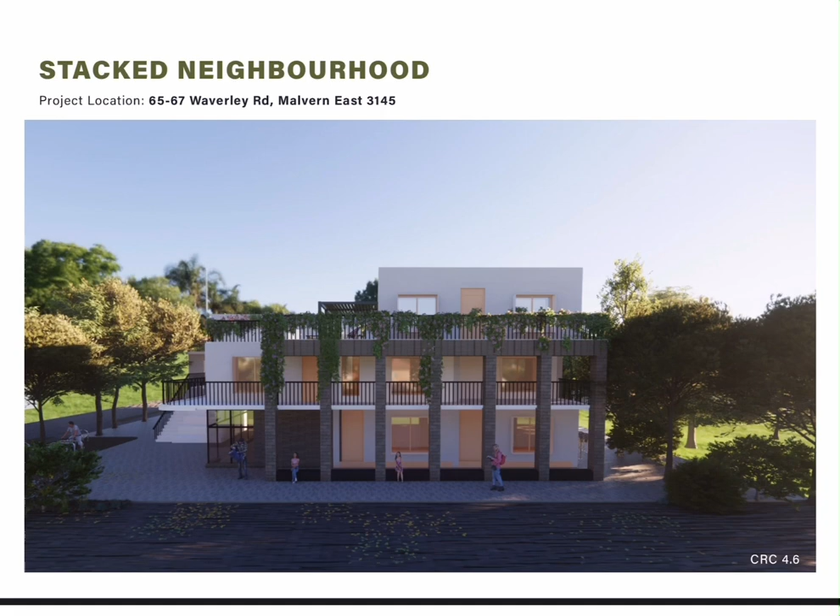With this principle in mind, we wanted a home that we can age in place, meaning its ability to adapt as we grow or move. And to achieve this, our primary concept was the kit of parts that allows us to adapt the internal volume as time moves forward, and combine this with the chosen material and design principle. And the Stacked Neighborhood was produced.

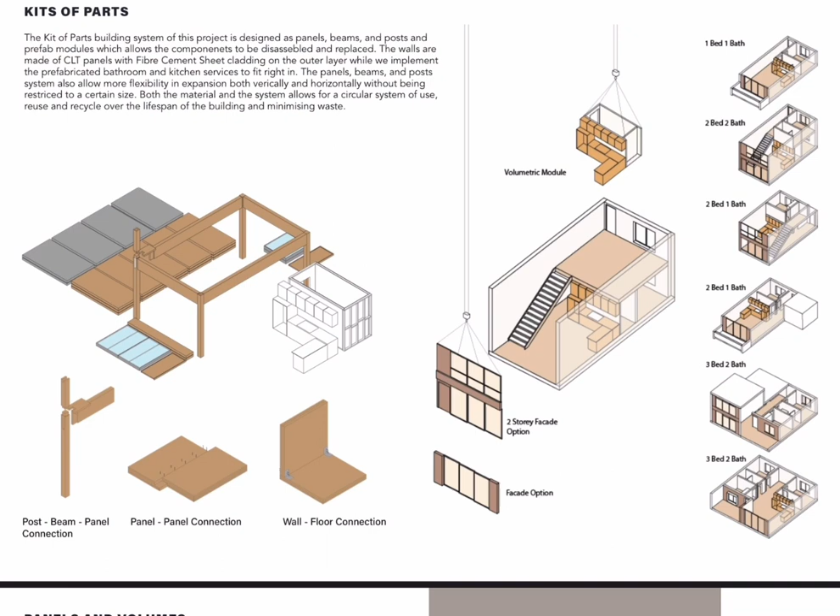So the kit of parts building system of the project is designed as panels, beams and posts and prefab modules, which allows the components to be disassembled and replaced. The walls are made out of CLT panels with fiber cement sheet cladding on the outer layer, while we implement the prefabricated bathroom and kitchen services to fit right in.

The panels, beams, and post systems also allow more flexibility and expansion both vertically and horizontally without being restricted to a certain size. Both the material and the system allow for a circular system of use, reuse, and recycle over the lifespan of the building, minimizing waste.

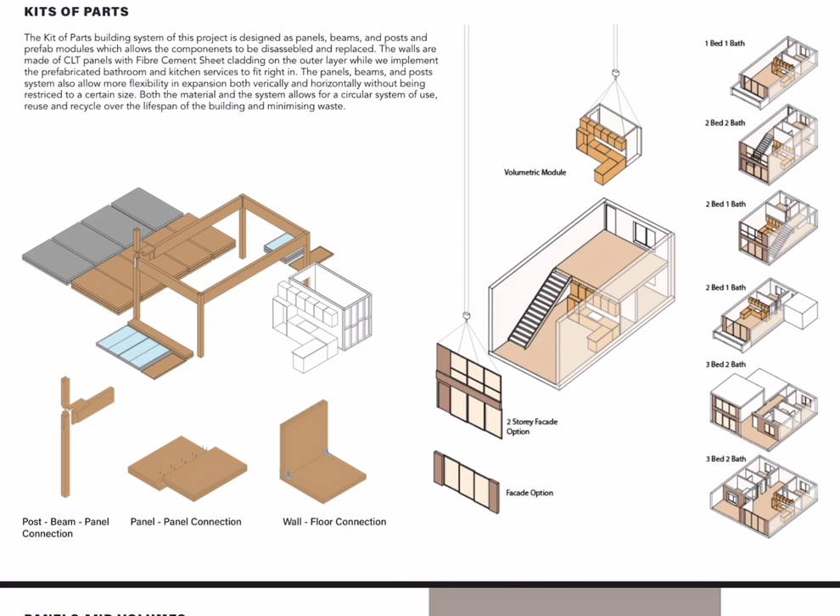So as you can see on the right diagram in our proposal, this is how we achieved a double story and single story variation that allows for generous living in sunlight as we use the post and beam system to expand and contract. You can see in the diagram, the bathroom is a prefabricated module and the main structure of the unit can be disassembled into panels and posts.

For sustainability, the apartment also incorporates passive house principles, which include double glazing, high-performing windows, great ventilation for indoor air quality, thermal insulation, and airtight construction. This is to ensure that each unit would be economical to operate and require minimal energy to keep them at a comfortable temperature. All of the units face north, while the bedrooms are located towards the south for effective cross-ventilation and enhancing the living conditions.

There are also shared communal spaces such as laundry, rooftop deck, and garden that minimize the overall cost and create opportunities for engagement. Along with these elements, we are also including a rainwater storage system and permeable pavings to reduce stormwater runoff. Open walkways that connect the two buildings create moments within the community as well as the street below that positions this project as a homely place in the neighborhood.

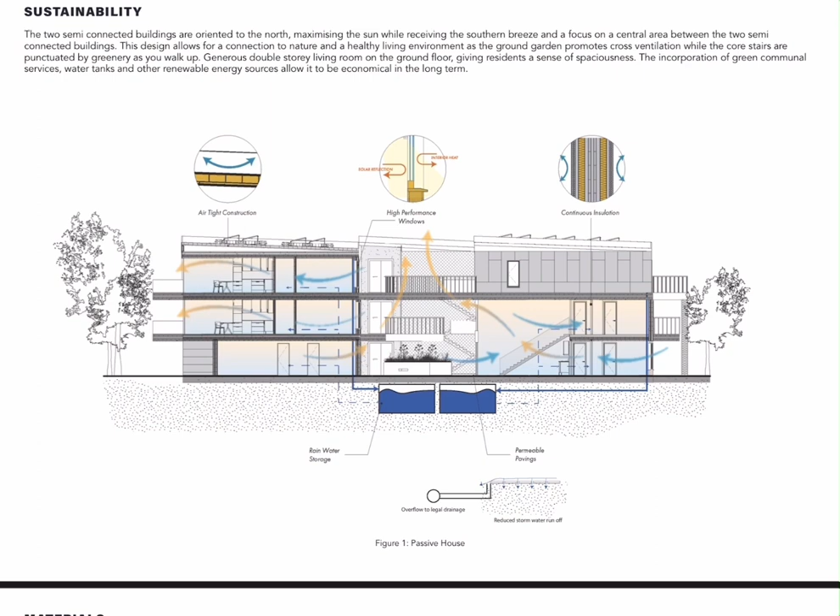And due to its proximity to the tram stop and shops within the area, we not only incorporated communal garden and retail space, there are seats and bike racks available for those waiting for the tram as well.

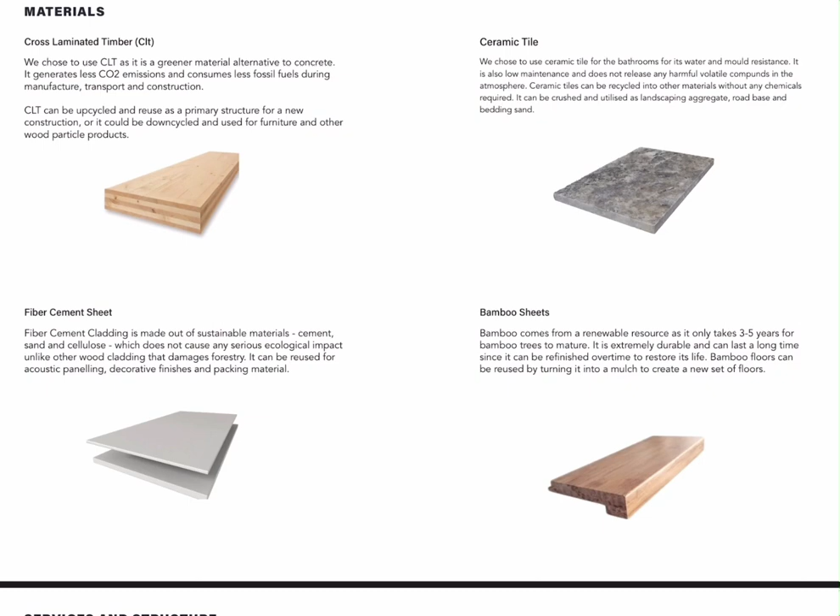These are our main materials that we used in the panels, so cross-laminated timber and fiber cement sheet for our cladding, and then ceramic tiles in the bathroom and bamboo sheets for flooring because of its recyclable properties and low carbon emission. Within the kit itself, we opted to use CLT as our main structural material and walls because from our research, CLTs are more sustainable, easily cut to size, and also connected via bolts instead of glue.

And in response to the agility part of the brief, this means that in the long term, we have the flexibility to reframe this into a different configuration, but also its thermal and sound insulation properties make it desirable. CLT panels are lightweight, which reduces the overall weight of the building and the foundation requirements. They also have a high strength to weight ratio, which means that they can support larger loads than other types of wood products. Their qualities also made it more lightweight while being structurally sound for a medium density project like this.

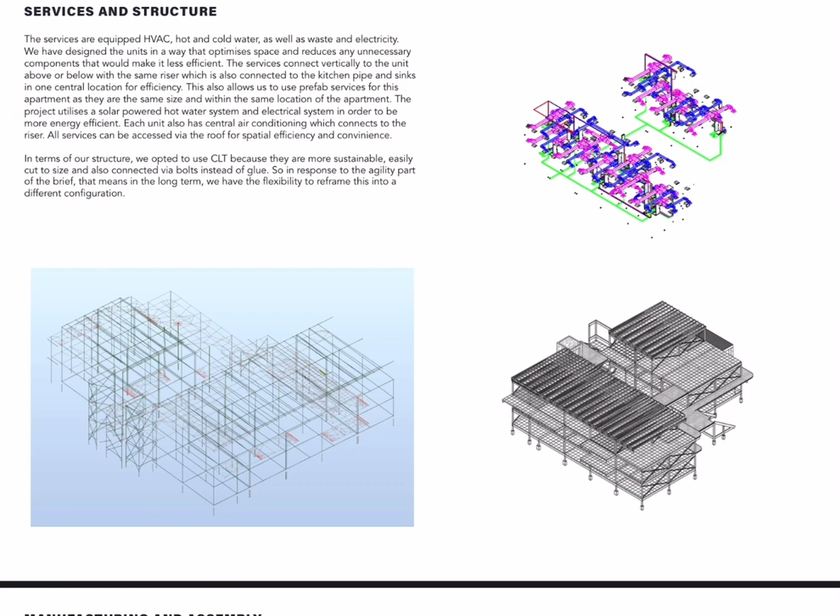And in terms of our services, we have designed the units in a way that optimizes space and reduces any unnecessary components that would make it less efficient. So the services connect vertically to the unit above or below with the same riser and also connect to the kitchen pipe and sinks in one central location for efficiency. This also allows us to use prefab services for this apartment as they are the same size and within the same location of the same apartment.

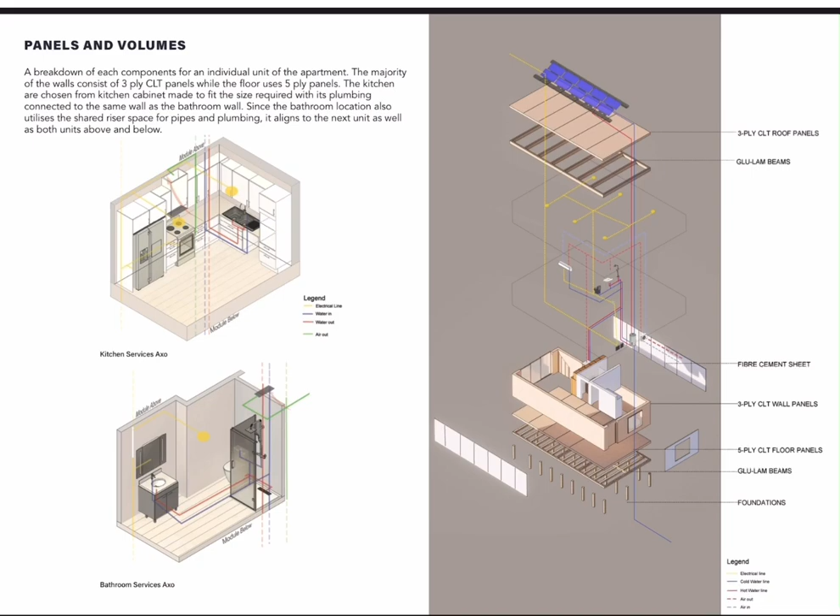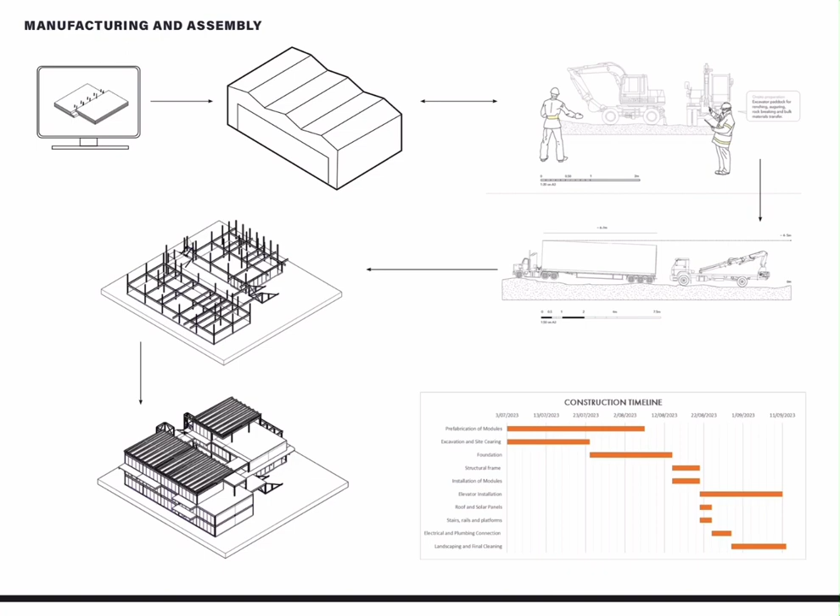So when it comes to assembly and manufacturing, the advantages of prefabrication shine because of its components being made before transporting to site. And in our project, each panel is 6 meters by 3 meters, specifically designed to fit on the bed of the truck to minimize transport costs and emissions associated with this. This is estimated to take somewhere between 2 to 2.5 months in order to fully complete the structure and install the services.